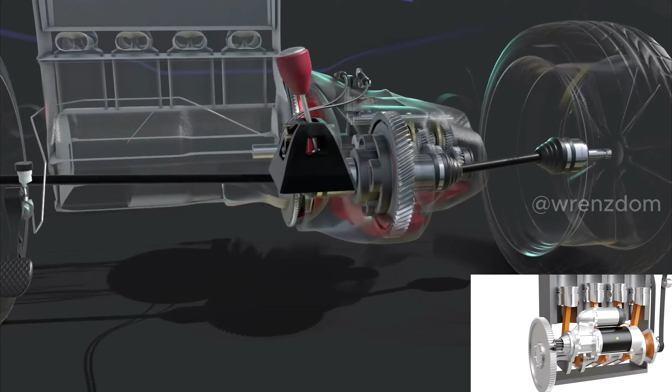I'm Jake O'Neal, creator of Animagraphs, and this is how a manual transmission and clutch works.

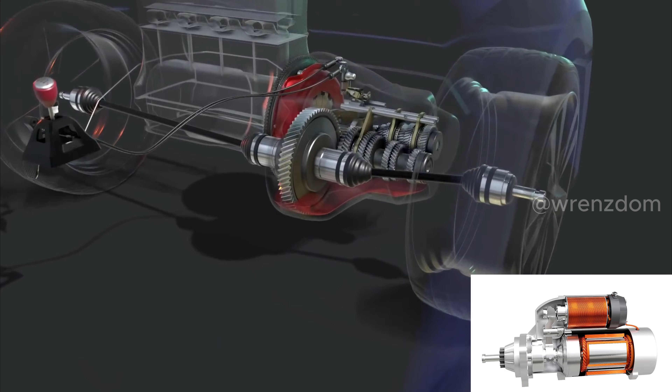Manual transmissions are rare in new consumer cars, but millions of units still exist in older cars, commercial, and racing applications. For this video, we've chosen a front-wheel drive arrangement. Our transmission model is a constant mesh type design where gear sets are always in contact with each other.

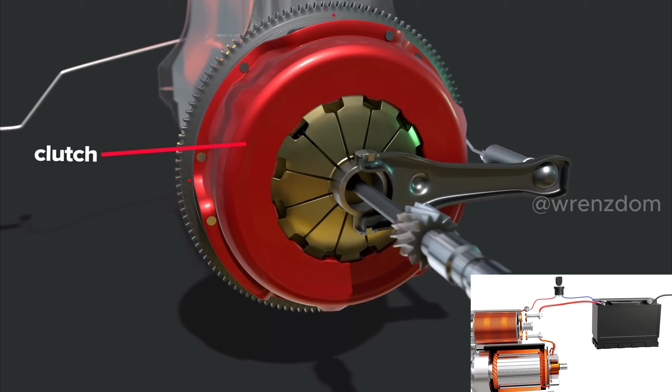Let's start with the clutch. The clutch assembly is securely attached to the flywheel, which is bolted to the engine. It's always spinning if the car is running.

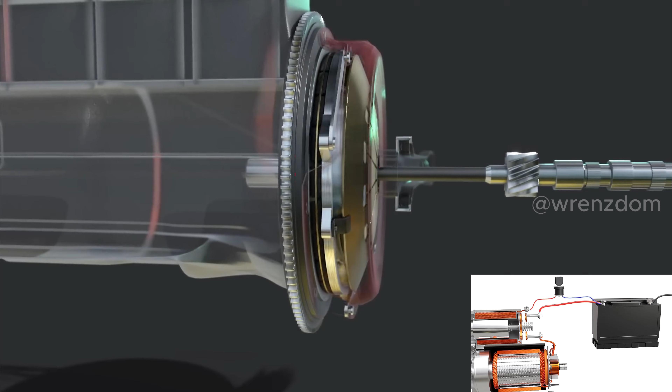The components inside this assembly allow power flow to be disconnected from the transmission input shaft. Note that the transmission input shaft does not itself connect to the engine crankshaft or flywheel.

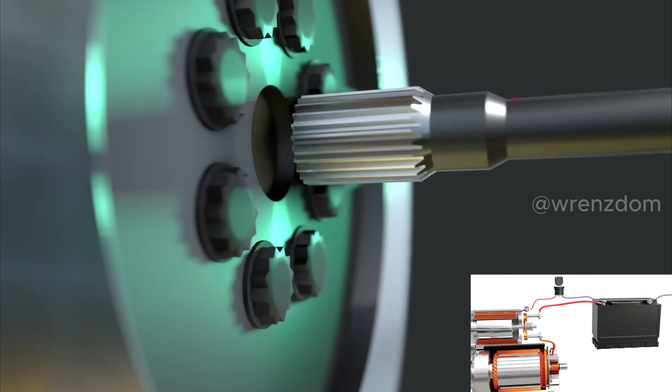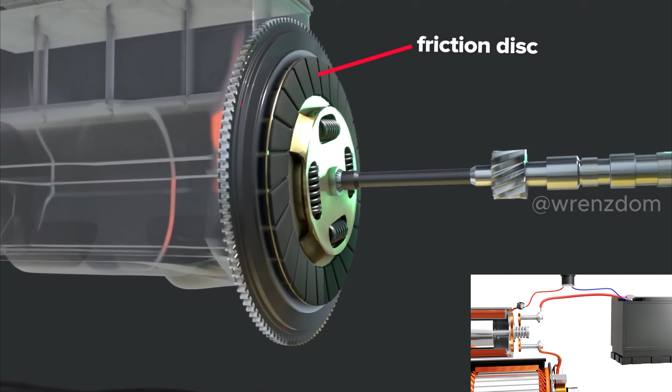Connection to engine power is accomplished with a sliding friction disc, sometimes called a clutch plate, sandwiched between the flywheel surface and a movable pressure disc. The clutch plate assembly is splined to the transmission input shaft, but can slide back and forth.

The pressure disc gradually squeezes everything together as the driver releases the clutch pedal for a smooth connection to engine power.

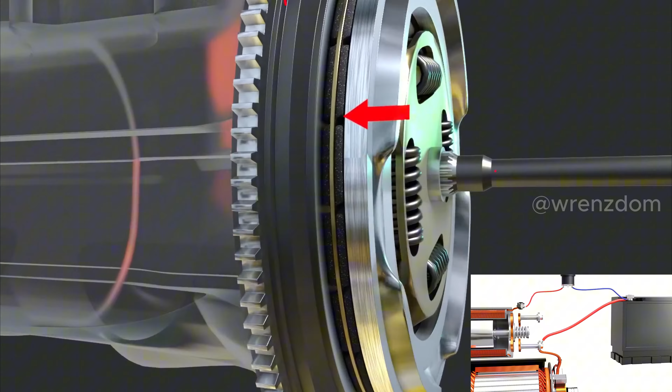To further ensure smooth power delivery, the clutch plate has a built-in damping system. The friction plate floats on the transmission input shaft.

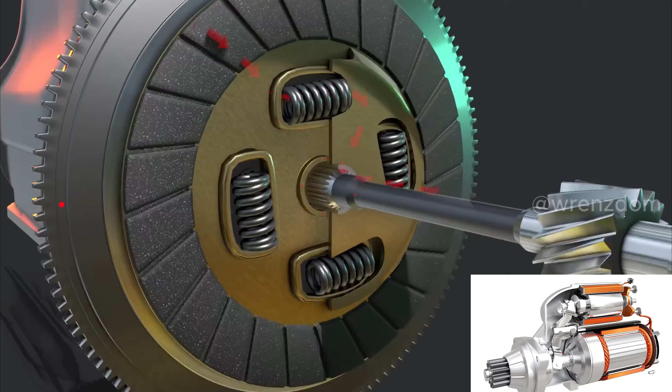Power flows from the disc through damping springs which push against a rotating hub plate whose center is splined to the transmission input shaft. The springs continuously absorb vibrations or other potentially harmful anomalies in the flow of power.

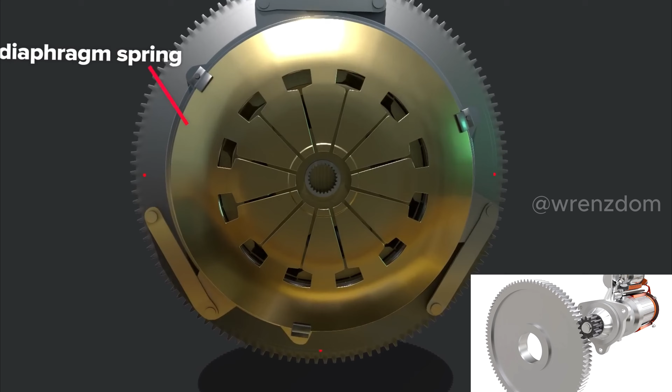Now let's look at how the pressure plate moves. The pressure plate is connected to a special diaphragm spring. This strong spring is what naturally presses the pressure plate to the flywheel.

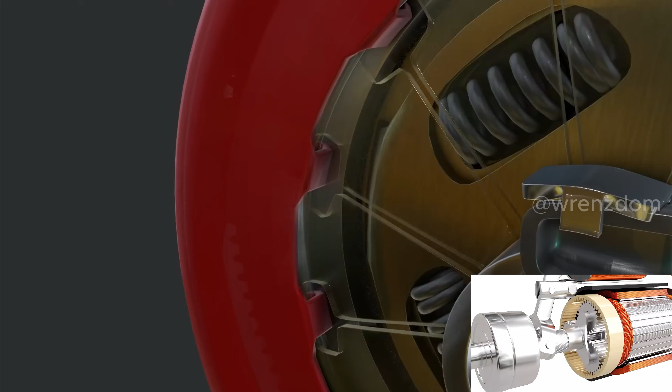The outer cover has hooks that hold the diaphragm spring securely in place and act as a fulcrum. There are also supporting leaf springs attached to the pressure plate and cover.

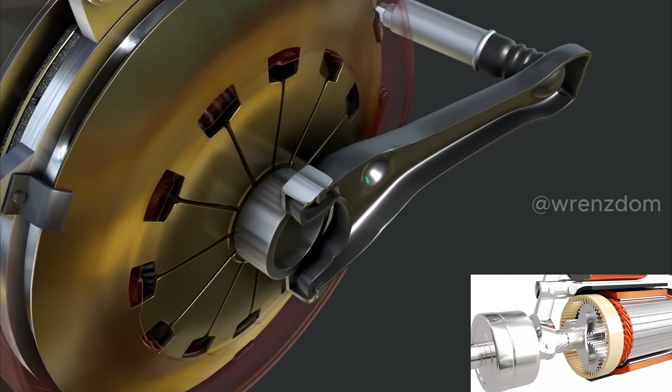The clutch fork sits at the center of the diaphragm spring. As the clutch fork pivots, it presses against a release or throw-out bearing, depressing the diaphragm spring's inner prongs, which in turn lifts its outer edge and the connected pressure plate.

Let's see that movement a few more times. The clutch fork acts as a lever with a fulcrum point on the transmission case interior surface.

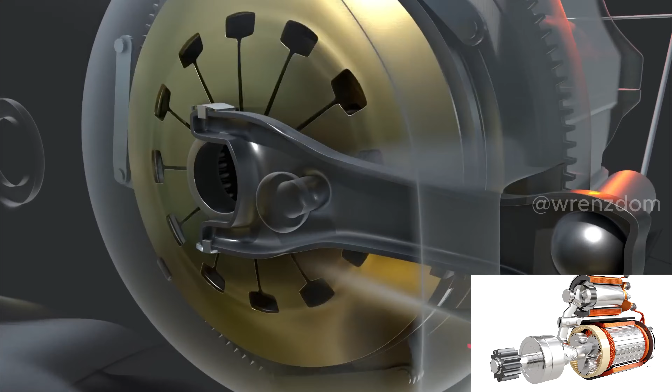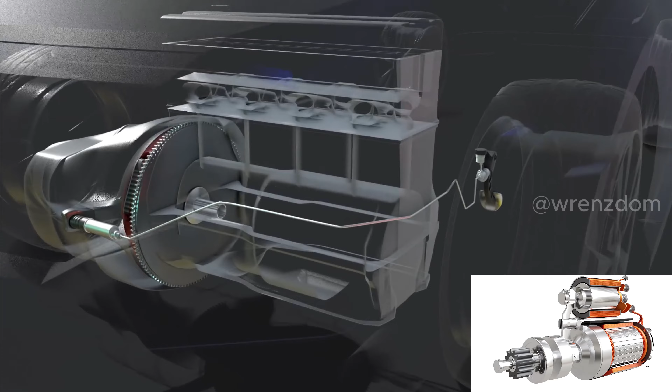It's driven by a hydraulic actuator whose lines lead back to the clutch pedal with its own hydraulic actuator and fluid reservoir.

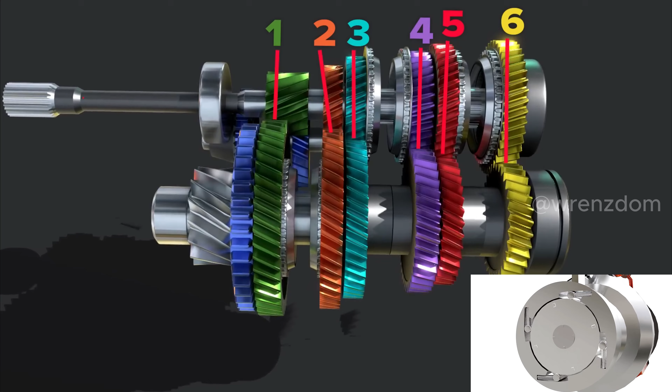The gears. Each speed has a gear set so that input speed can be different from output speed. The speed gears in this constant mesh transmission are always linked.

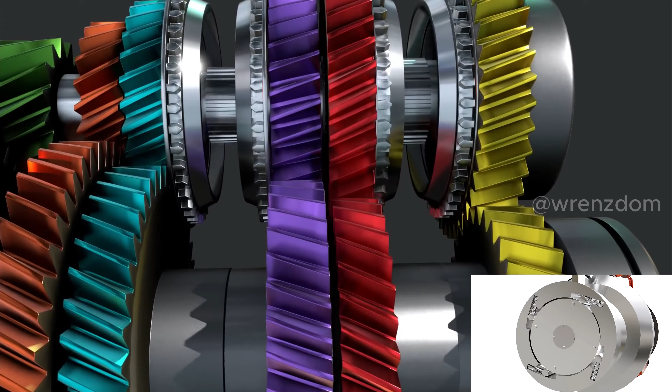They have diagonal or helical cut teeth for quieter operation. Notice the reverse gear set with its straight teeth. This transmission will make a familiar gear whining sound when in reverse.

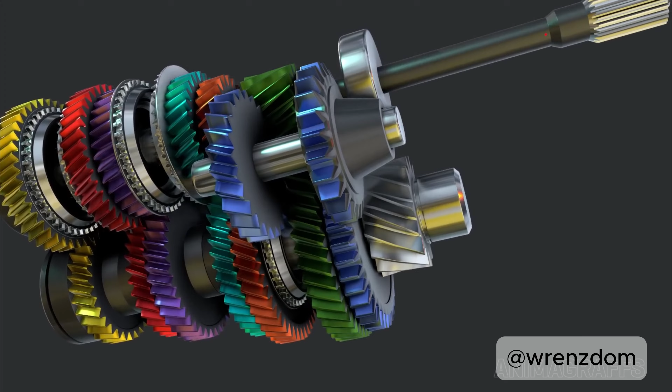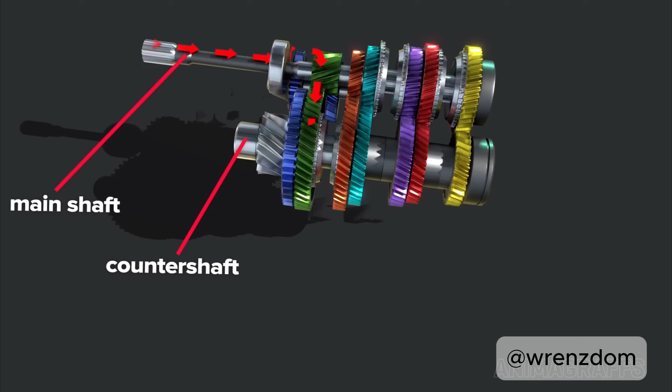Engine power flows through the main shaft, to the countershaft, to the differential assembly, and out through front axles.

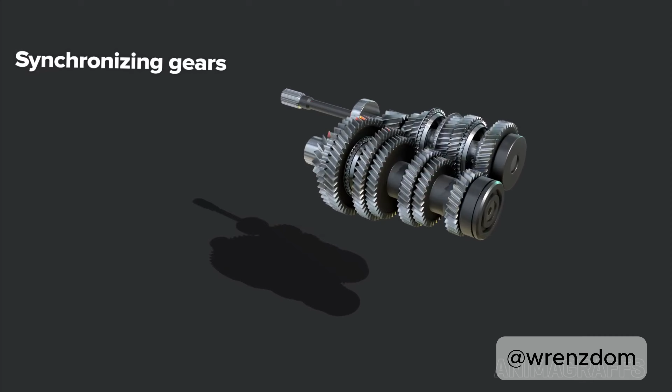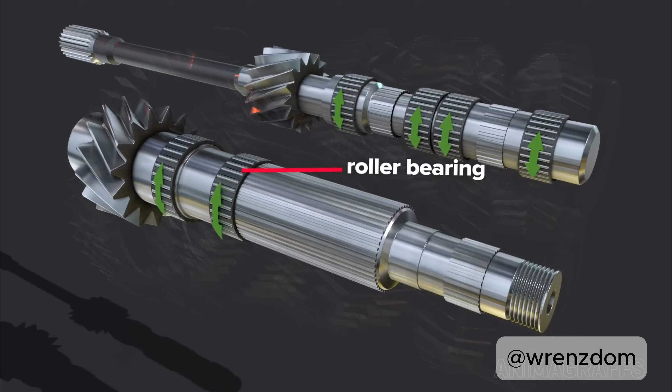Synchronizing gears. To make gear shifting possible, one gear in each set floats freely on its shaft, riding on a roller bearing. The other gear in each set is either connected with splines or directly machined into its respective shaft.

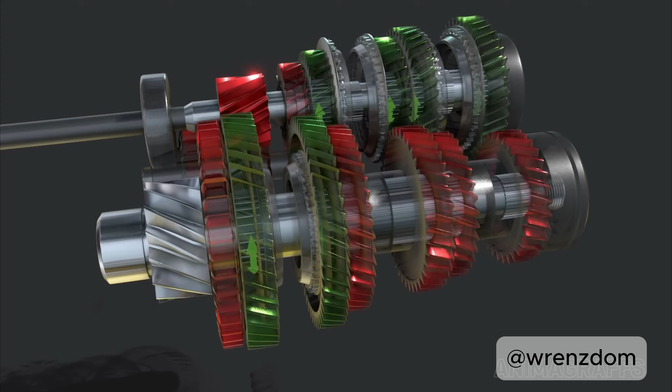For power output, the floating gear in each set must become securely connected to the shaft through the synchronization process. Between each gear set, there's a synchronizer hub that's splined to and rotates with the shaft.

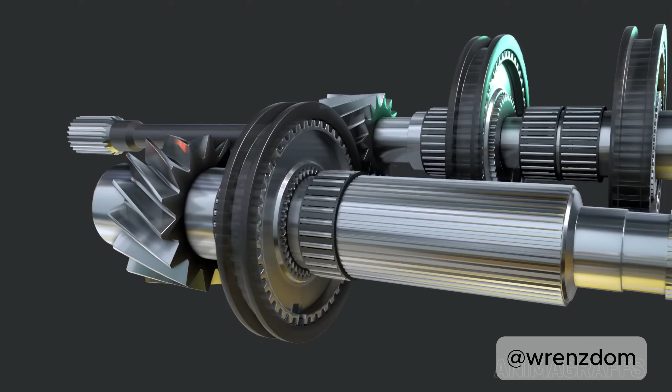A sliding shift sleeve is also driven by this hub, which can be moved back and forth by a selector fork. Forks are connected to sliding rods that are held by the external casing.

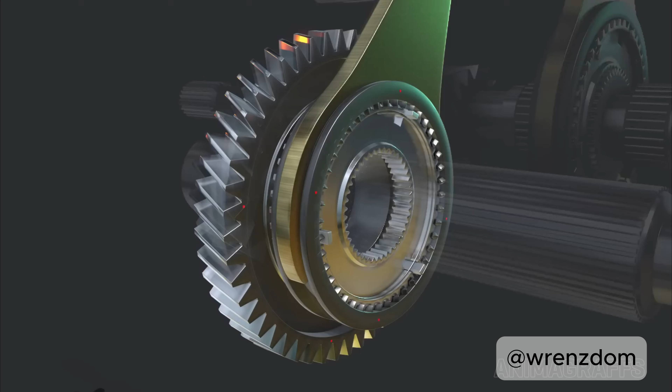During gear selection, the fork moves the sleeve towards the desired gear. A blocker ring sits between the sleeve and the gear.

The blocker ring's job is to get everything spinning at the same speed and lined up for an engagement attempt, or block further movement if synchronization isn't possible for whatever reason.

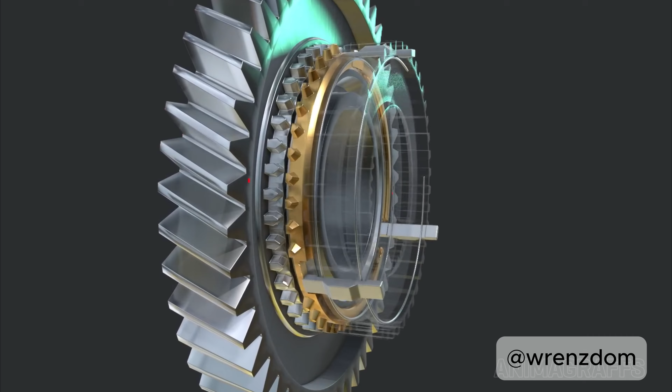The hub has slots for 3 synchronizer keys that spin the blocker ring, but allow enough play so the blocker ring can adjust on the fly as the sleeve teeth approach.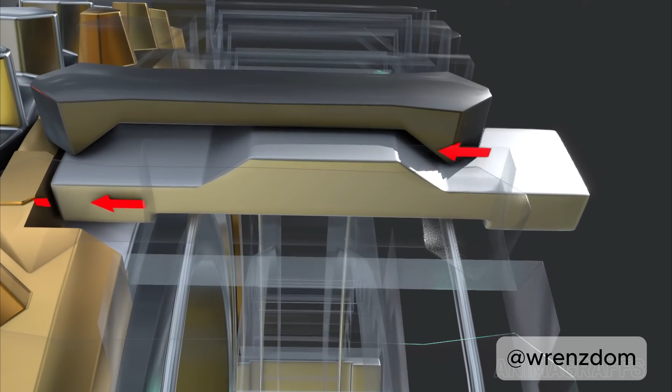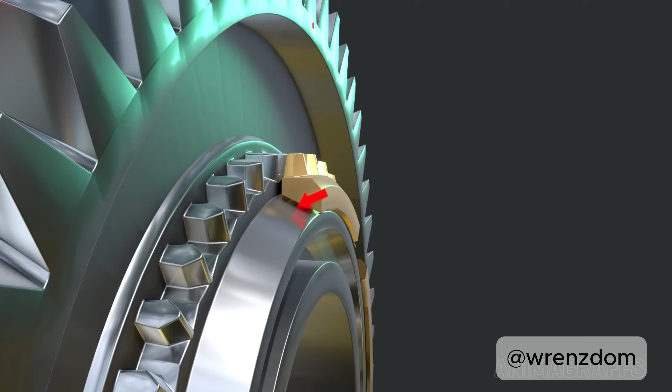The shift sleeve's internal teeth are shaped to push against the keys, which in turn press the blocker ring against the gear. The ring's inside surface is conical and has ridges to engage the cone-shaped gear surface like a miniature clutch.

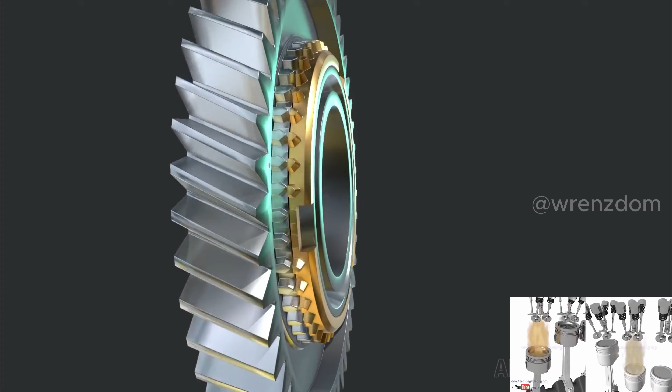Gradually, the gear begins to spin with the blocker ring. The keys are spring-loaded. Once enough pressing force builds, the keys are no longer needed and move down and out of the way.

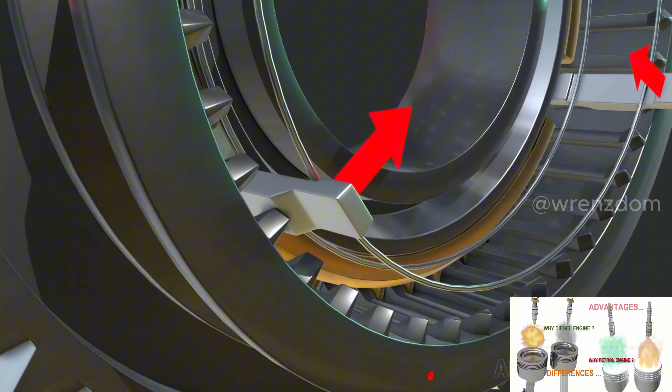This allows the sleeve to progress into its final synchronized position with gear locking teeth. This process enables fast gear selection between rotating components while keeping main gear teeth safe from the change procedure.

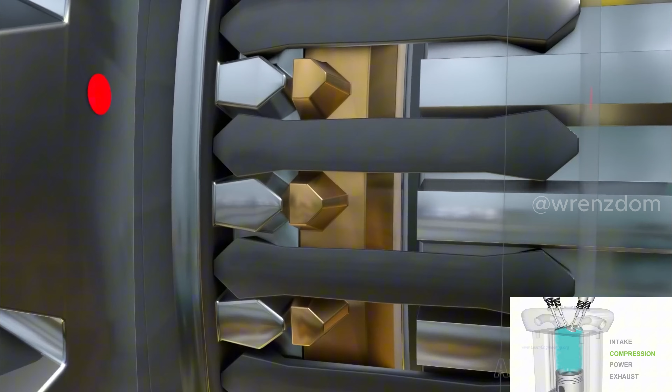Locking teeth on the sleeve and gear are slightly angled in some designs, encouraging a more secure connection. Now, power flows through the splined hub and sleeve, through the gear set, and out of the transmission.

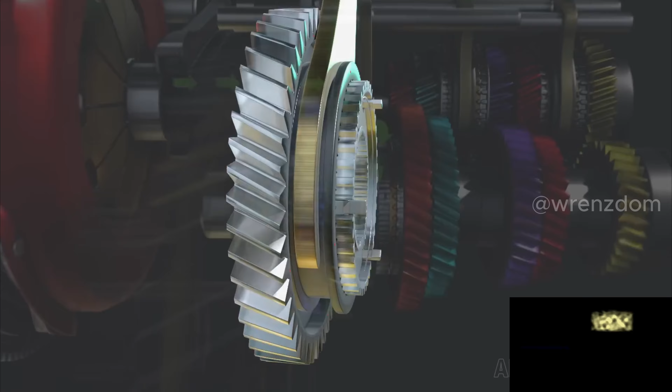To switch gears, the clutch is pressed in, pressure is relieved, and the sleeve can slide into synchronization with an adjacent floating gear.

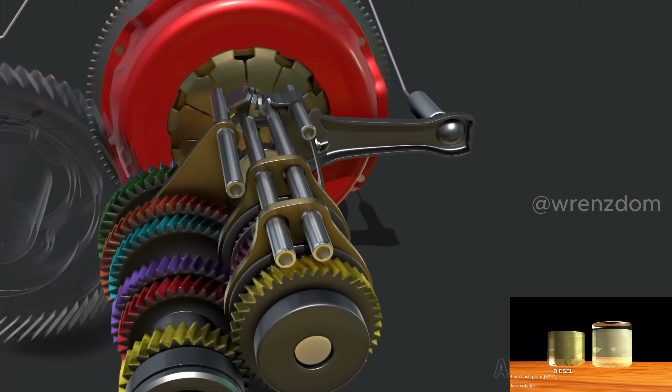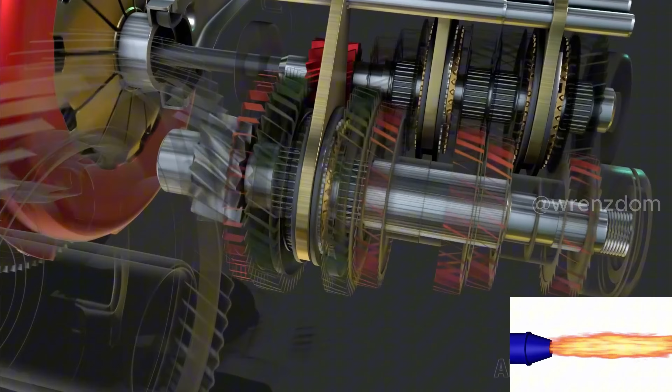Since each sleeve can only slide between adjacent gears, for this 6-speed transmission there are 3 selector forks and rods. The first and second floating gears operate from the output shaft, but this doesn't fundamentally change functionality in any way.

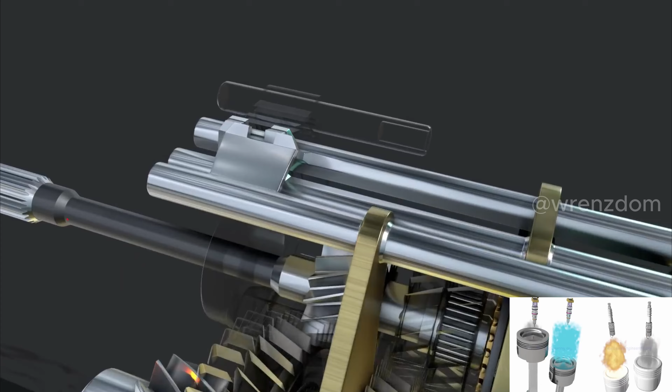Forks and rods only move back and forth, as directed by the shift change assembly.

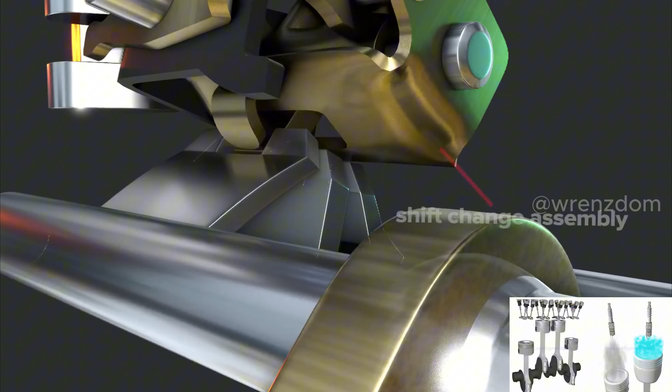This component can swing side to side to select a specific rod and fork. And once selected, a metal tab pushes the fork one way or the other.

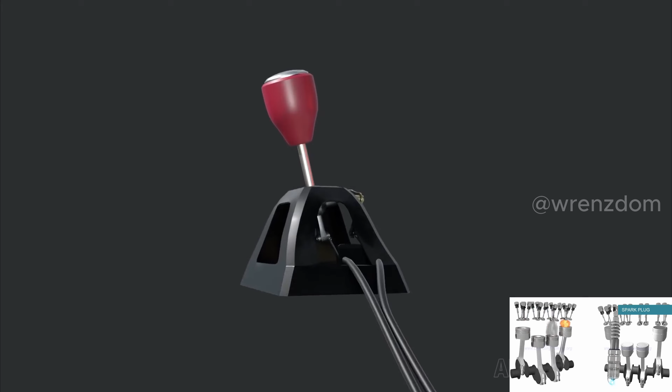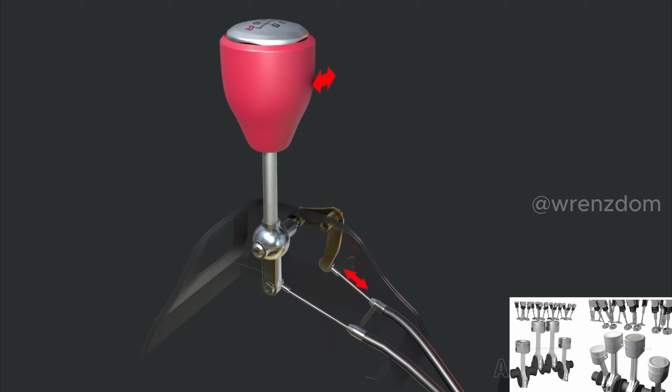Let's trace this component's movement from the shift lever itself. The shift lever rides on a ball that allows movement on 2 axes. Each movement axis is separated into its own cable.

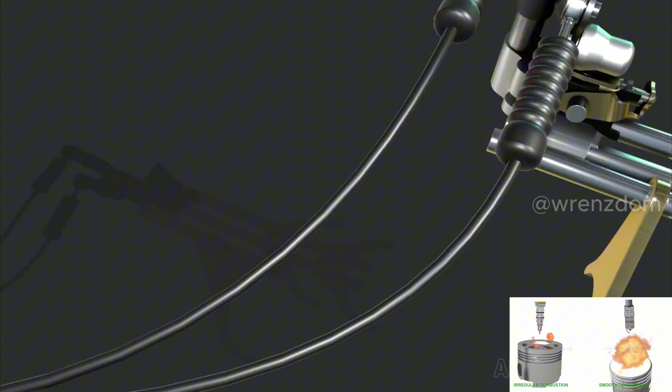These work something like bicycle brake cables to translate stick movement to the transmission. At the other end, cables are attached to a rod that protrudes out of the transmission case.

This rod can move up and down or rotate based on distinct cable input.

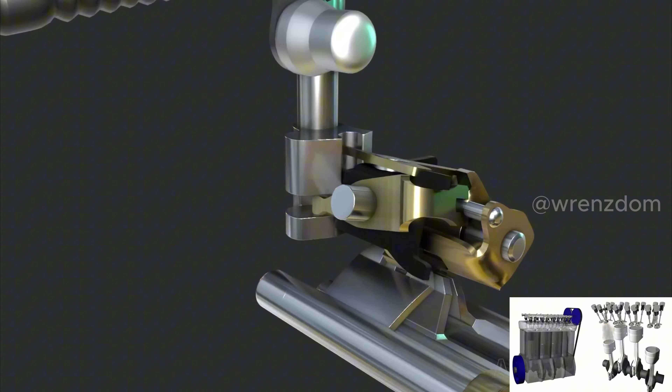A specially designed piece at the other end of this rod moves connected components to swing side to side or slide the metal tab back and forth.

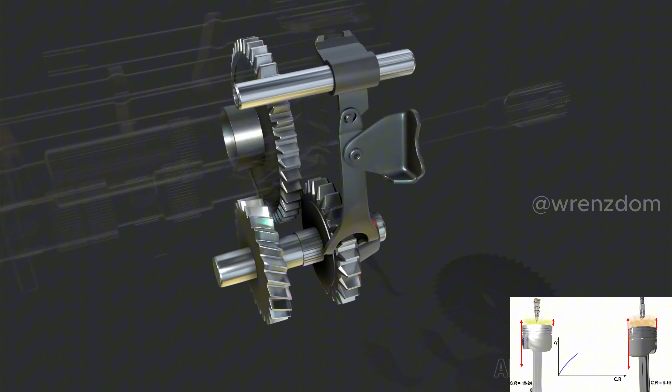Reverse gear. The reverse gear has its own rod and selector fork. The transmission must come to a complete stop to shift into reverse as there are no synchronization components. Adding the third idler gear to the system reverses final output.

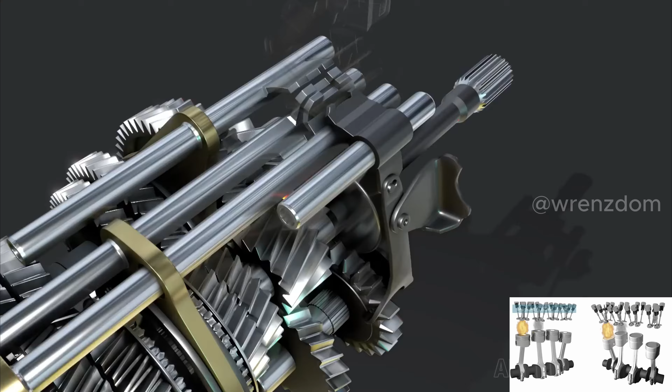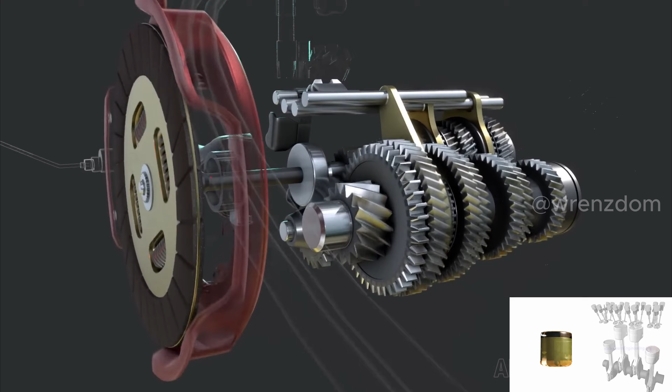Neutral. When in the neutral position with no gears selected and the clutch engaged, meaning the clutch pedal is not pressed in, the transmission input shaft spins, but since no gear is synchronized, no power flows out of the transmission.

Oil rests at the bottom of the case and is splashed up onto gears for lubrication. There's no oil pump or filter.